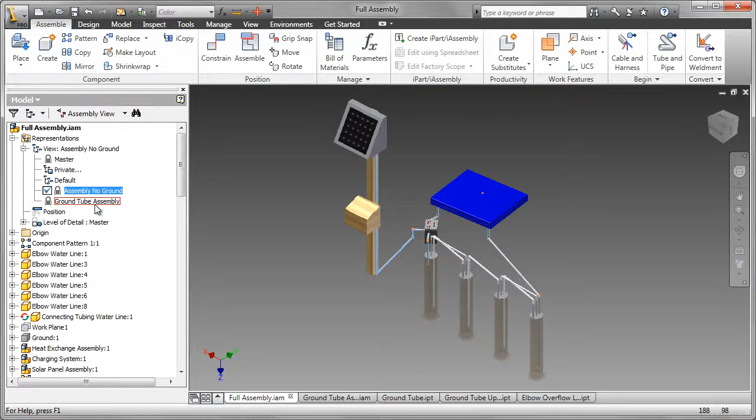With the solar panel and the control system box modeled, we're going to look at the other major parts. We'll start with the ground tube assembly, move on to the pump box, and finish with the cooling pad.

The ground tube assembly consists of 4 major parts. Here we can see them all linked together with the pipe. A single one consists of a tube, a lid, and a little overflow pipe coming in. Let's start by looking at the larger component.

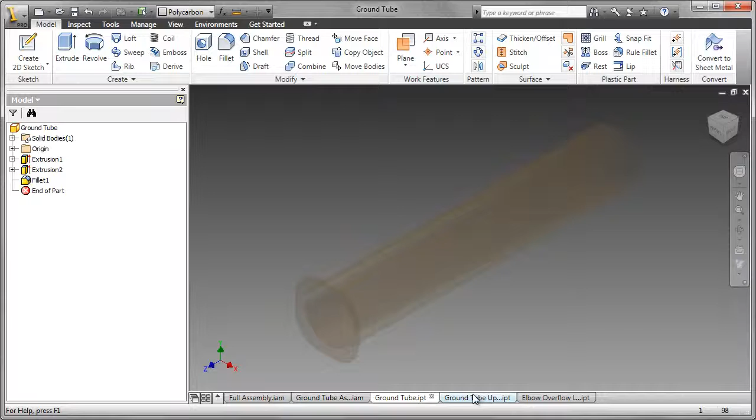It's quite simple, just a couple of extrusions, and I've rounded the corners off with a fillet. The top is a simple flat extrusion, and I've added 3 holes for the inlet, the outlet, and the overflow tubes. I made those 1 inch in diameter and a 1/2 inch in diameter. You can size those accordingly.

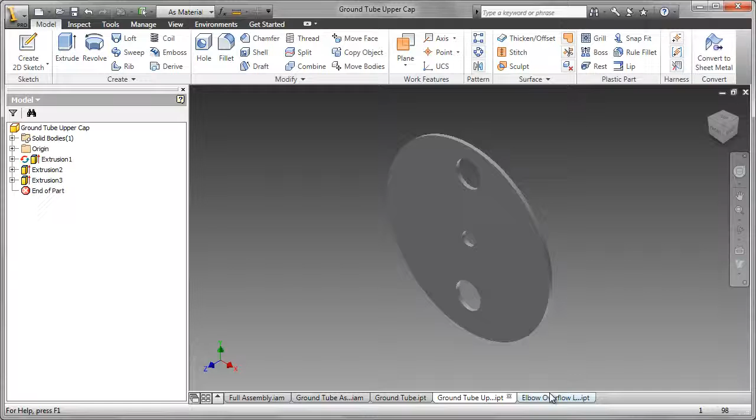The elbow overflow is actually a swept feature. Most of the tubing will be made out of simple extrusions, but this one's a little more complex, so let's have a look at that. To create a sweep, we need a profile and a path. The profile is 2 concentric circles, and the path is a simple line with an arc.

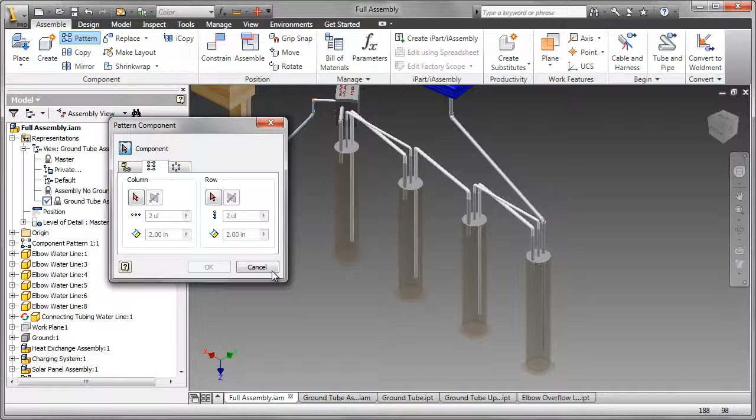Now let's go back to the full assembly. There are 4 of these tubes. You could place them all individually, but what I've done is place them as a rectangular pattern. You would select the first ground tube assembly and then add 3 more. And we can see the pipe connecting all of them, an inlet, an outlet, and an overflow.

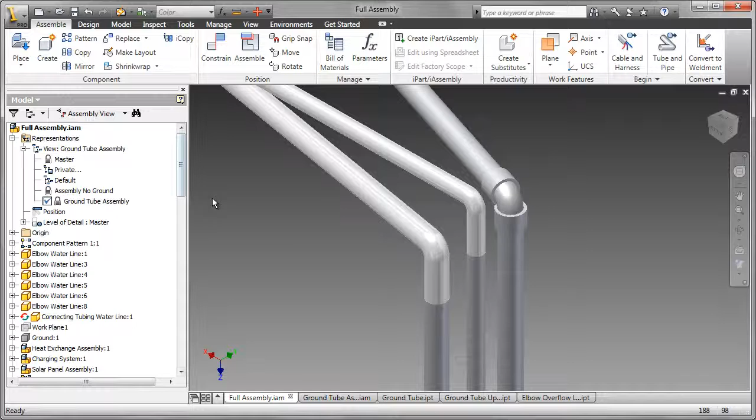You can see here I've also added a slightly different one. This was created using the tube and pipe environment. That's a more advanced solution, but you'll see an example of that in the provided assembly, and you may want to try that later on.

Now let's look at the pump box. The pump box houses the pump and has a number of holes placed in it for the inlet and outlet water going into the cooling pad. There's also a hole allowing the wiring from the solar panel, which provides power for the pump.

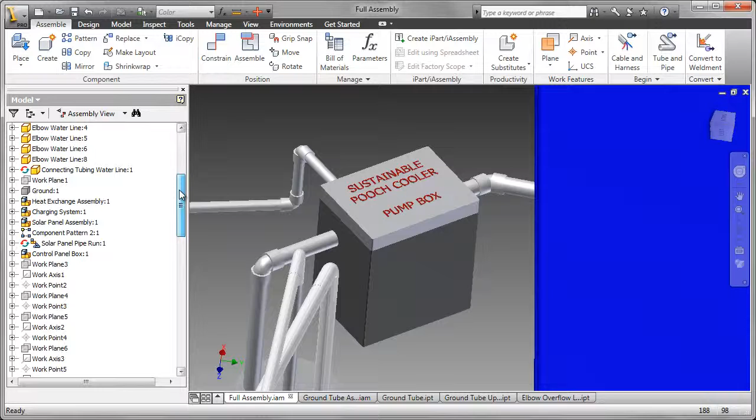Turn off the visibility of the pump box and you can see the pump that's inside. You can try modeling one of these if you wish, but I've actually supplied a pump for you that you can use. And here we see the cooler water coming into the pump, and it's been sent into the cooling pad.

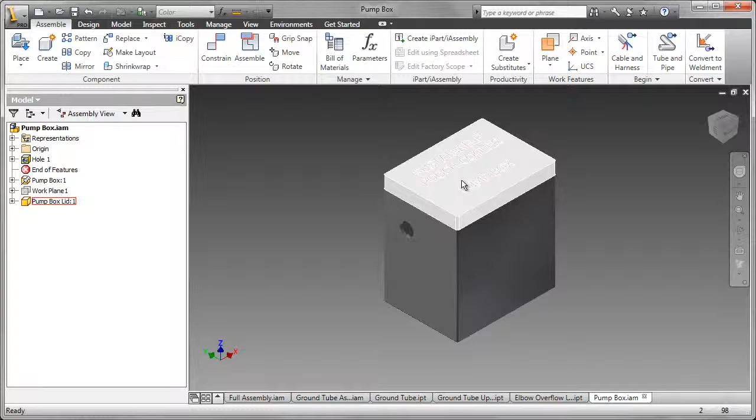Now let's look at how I created the pump box. There are 2 parts to it, just the lid and the base. The lid's a little more complex. We can see it as an extrusion, a shell, another extrusion, and something called an embossed feature. Let's look at how I created that.

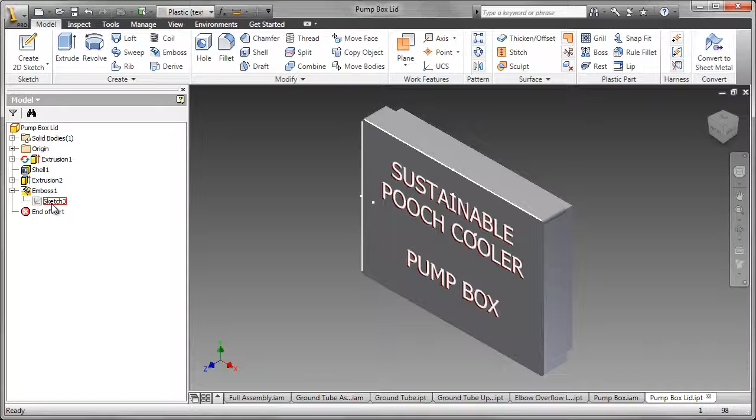To create an embossed feature, you need a sketch. Here we see that sketch being used in the embossed feature. When I edit the sketch, you can see that what I did was place some text on the surface of the lid. It doesn't have to be right on the surface, but in this case I did that.

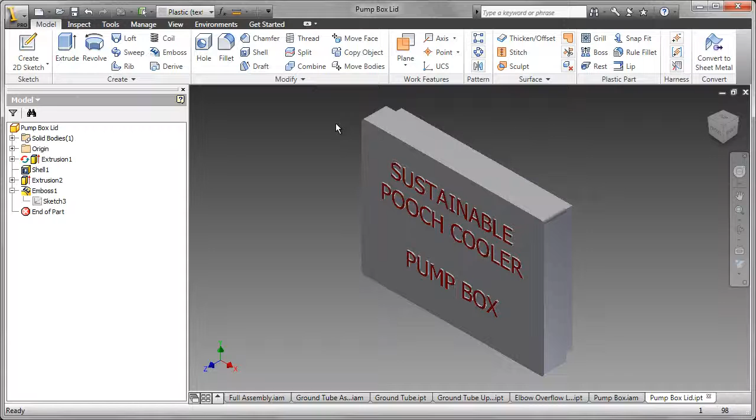Having placed the text, let's look at how the embossed feature was created. By editing the feature, we can see that I need to select a profile, which in my case was the text. I chose embossed, depth of 0.05, and changed the color of the surface to red, so we can see it a little more clearly.

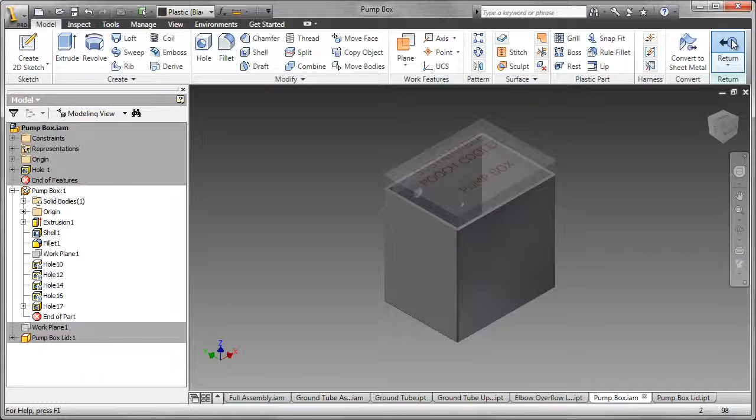The box itself is quite straightforward, just an extrusion that I shelled out and gave it a wall thickness. And you can see the holes I've added for the various pipes that are going in there.

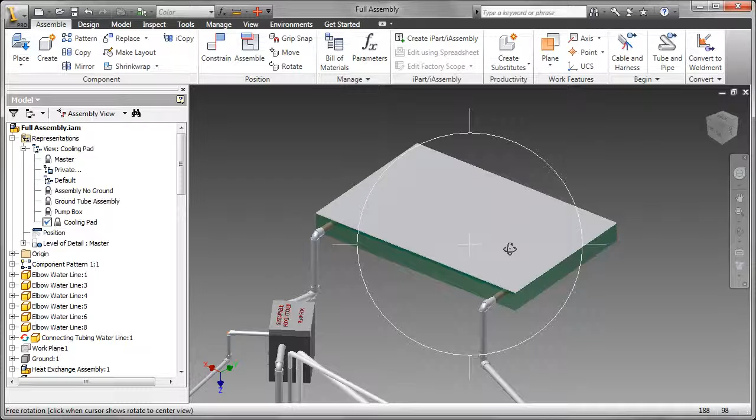The last major part is the cooling pad. It consists of 2 parts: the cooling pad itself that Ted the Pooch sits on. If we turn off the visibility of that, we can see another supplied part. I suggest you use this one.

This is where the cooling water would be entered on the left, and the slightly warmer water would come out on the right to go through the cooling process again.

The more comfortable part for Ted the Pooch is just a simple cover. I made an extrusion, shelled that out, and then, just to make it look a little better, I swept a couple of edges around there. You can make your own design.

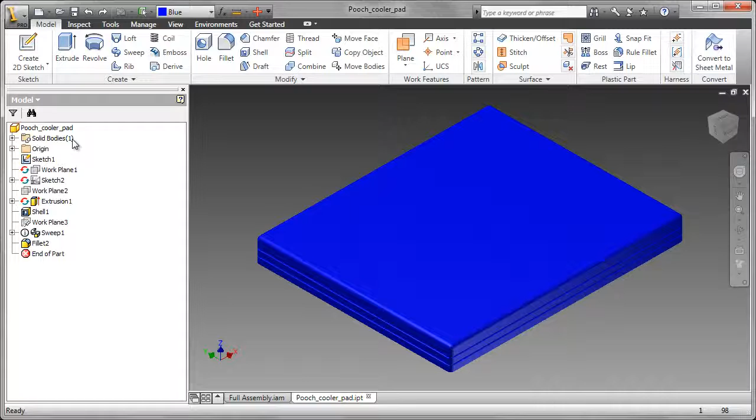Now let's return to the assembly. If we were building this cooler, we'd have to insulate any of the pipes that were carrying water. And in terms of repurposing or reusing material, we could in fact use something like garden hose for those pipes rather than rigid pipe.

Well, we've completed the modeling of the parts. What we want to do now is document the parts. I'm going to do that by moving into an IDW, or drawing, file. In this case, I've brought in the full assembly, added balloons, and a parts list, and I'd like to add the details of all of the parts into a single IDW file.

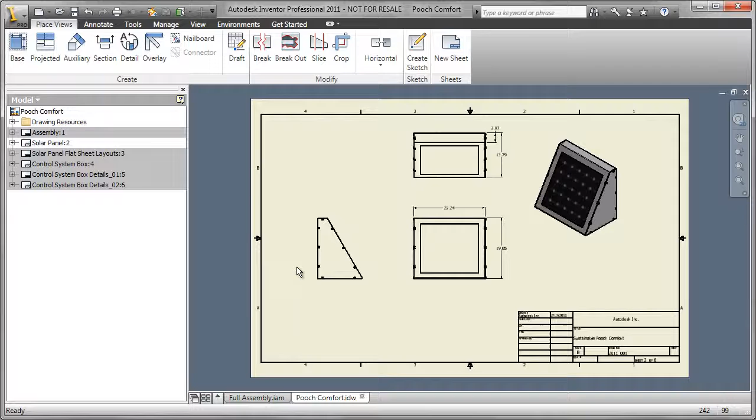So here we see the solar panel with some general dimensions. And because that's from the sheet metal environment, what I can do is bring in the flat layout. This happens automatically within the sheet metal environment and allows us to dimension it. We could also export this data to a CNC machine and have it automatically created that way.

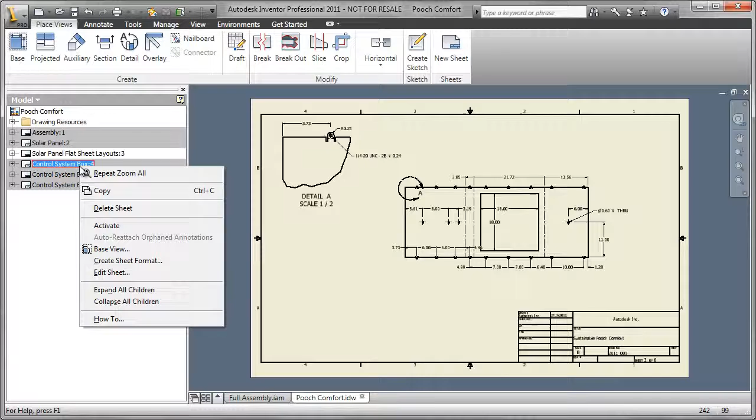You see I've got the control box, details of the control box. Now we continue to add all of the details of the major parts in a single IDW file.

We've now completed the modeling and the documentation of the Pooch cooler.